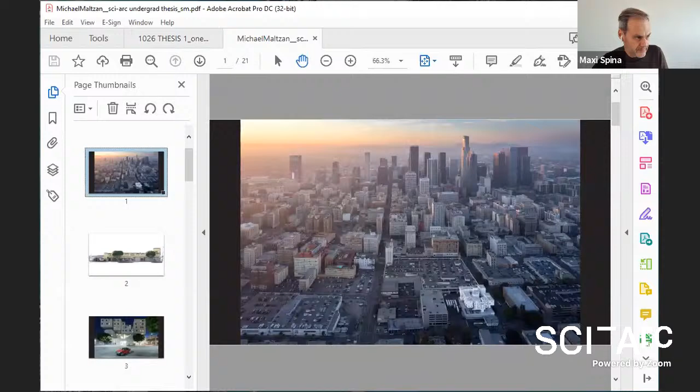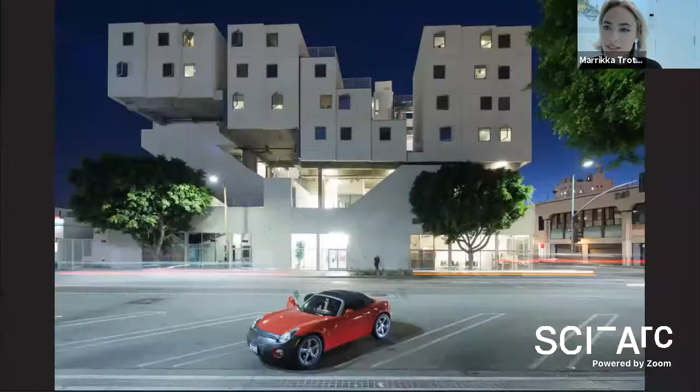Thanks, Maxi. So hi, Michael. Hi guys, thank you so much for talking to us today. I'm really looking forward to you sharing your work. And it's funny because, you know, here in Los Angeles, at least the initial encounter with Michael's formidable reputation comes in the form of housing.

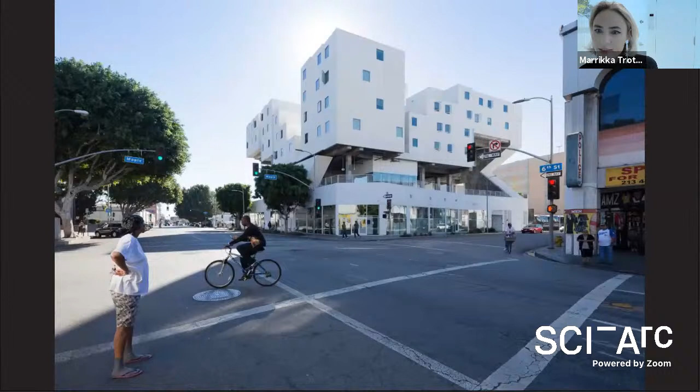But actually, there's a larger approach and a whole range of typologies that the firm has taken on since Michael founded it in 1995. So I just want the students to be aware that we're looking at a small slice of the overall work. It is, I think, particularly germane though, based on the amount of housing as a program typology that is available and being engaged by our students this semester, and also the ever more obvious urgency with which housing needs to be addressed in the city of Los Angeles in particular, as well as in many other places around the country and indeed around the world.

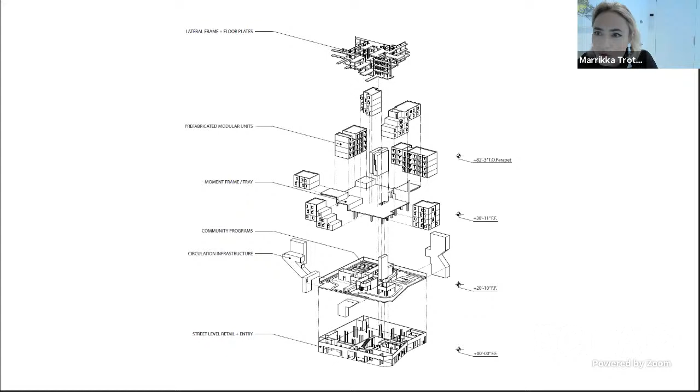So just a few hot seconds on Michael's CV, so you guys know where this guy is coming from. He actually started out in architecture and art at the design school, Rhode Island School of Design, RISD, on the East Coast. Graduated there with the Henry Adams AIA Gold Medal under his belt, proceeded on to the Harvard GSD, where he graduated with an MArch in distinction. He is now a fellow of the AIA, the American Institute of Architects.

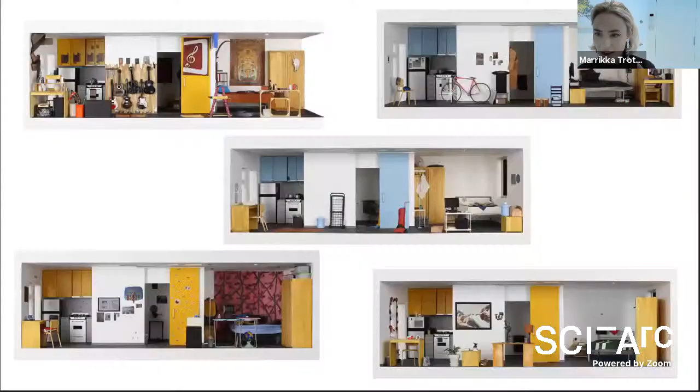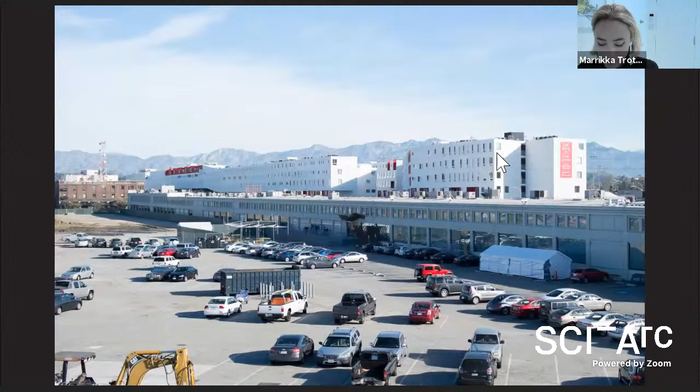He has received many, many AIA awards, including most recently a 2020 Best of the Millennium Award. I think that's pretty cool to win a Best of the Millennium Award from the Los Angeles chapter of the AIA. His work is part of the permanent collections of MoCA LA, MoMA New York, and the CCA up in Montreal. He's participated in the Venice Biennale a number of times, most recently in 2020. He's a recipient of the American Academy of Arts and Letters Architecture Award. He's elected to the National Academy of Design in 2020.

And actually recently I caught a really wonderful conversation, Michael, that you did with some of your colleagues at the GSD. It was a conversation hosted by the Joint Center for Housing, and you were specifically being asked to respond to the prompt: what exactly can architecture do about homelessness? And this is an ethical issue that has long been at the heart of Michael Maltzan's practice and Michael Maltzan Architecture.

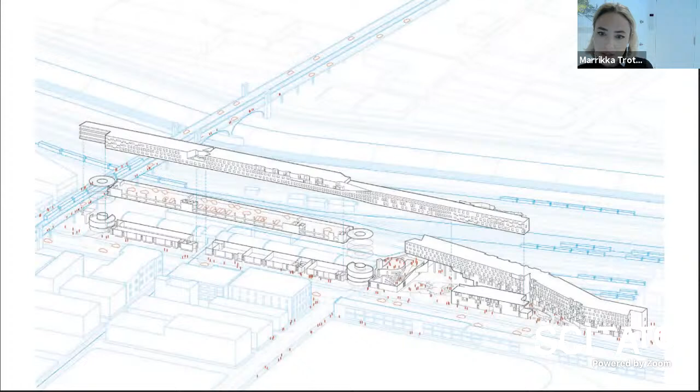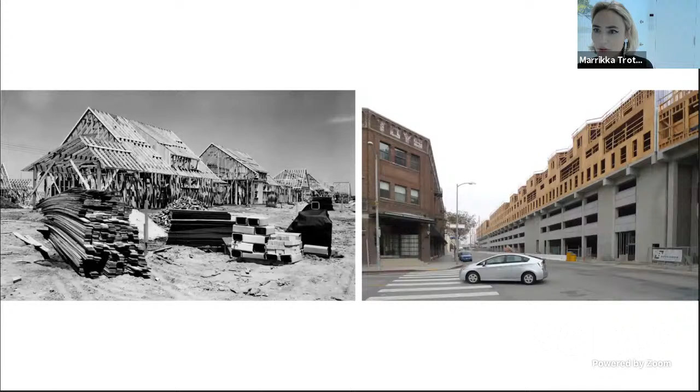Some really innovative work in terms of not just getting it done, but also the scale at which it operates. So with all that being said, we decided to focus today on two different housing projects, each very innovative, and one of them many of you SCI-Arc students know intimately because it is the building in which you live. And that, of course, would be One Santa Fe.

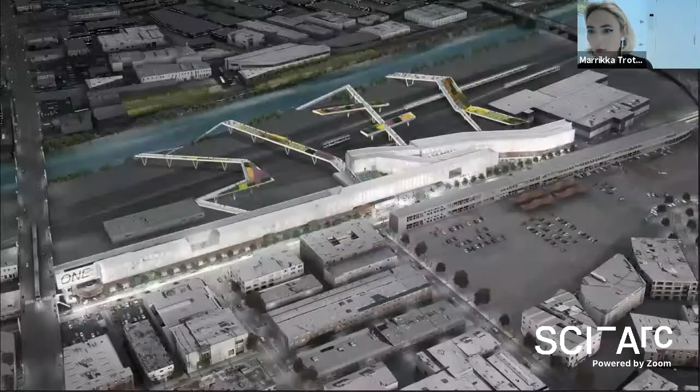But before One Santa Fe, Michael pioneered an architectural typology that had not existed in Los Angeles before then, known typically as permanent supportive housing. And he worked with some real thought leaders in the city, Skid Row Housing Trust, to bring about what seemed at the time to be an impossibility.

Housing for Los Angeles's homeless, many of them facing the other conditions that often go along with that. The unhoused population faces issues related to veterans, PTSD, and other psychological traumas, as well as rates of HIV/AIDS not seen in the general population, as well as complicated issues surrounding addiction and the kinds of psychological damage that go hand in hand with not having a place to call one's own over time.

And actually, one of the critiques that was leveled against Michael's work with projects such as the ones we're going to look at today is, how could you possibly design something so nice for these people, for this population? Strange question to ask, but it goes to the heart of something that concerns all of us in Thesis, which is, what is it that architecture does? What is the work of architecture? How does it operate in the world?

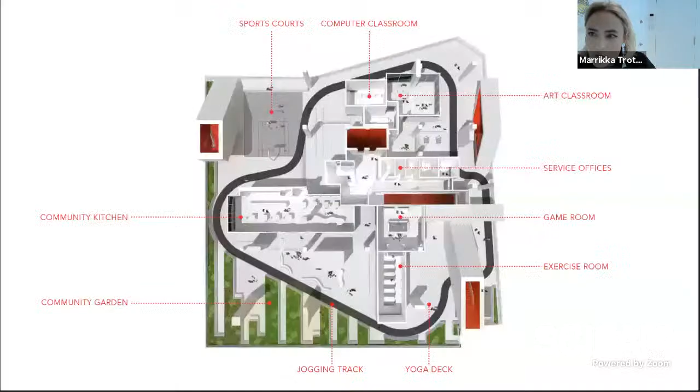And can it operate both as something that does the work of putting roofs over people's heads, and as something that does the work of communicating, of something that represents, of something that embodies, of even something that maybe bodies forth. So all that to say, can't wait for this.

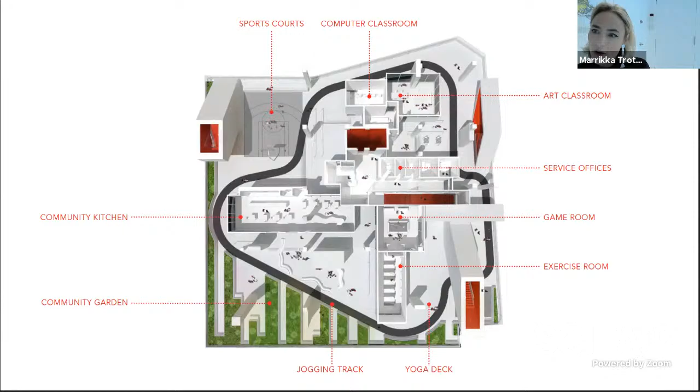Michael, thank you so much for being here. And would you like to give us a little bit of background about how you got involved in housing to begin with in the city of Los Angeles, and maybe start from there?

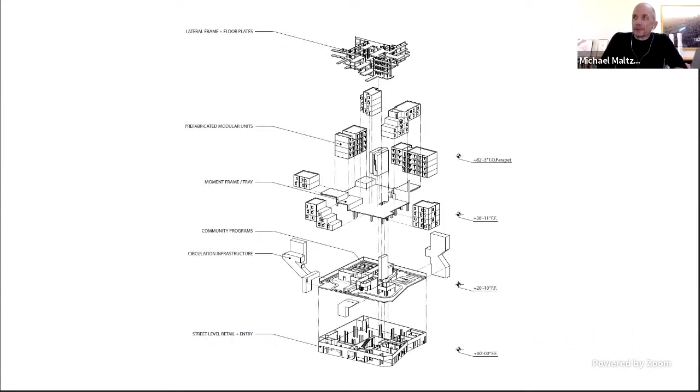Sure, and thank you for a very nice introduction. I have been working, Marrikka, as you mentioned, on a wide range of projects and typologies, programs, since the starting of my practice. That was in 1995. And while the work has been varied, and also varied geographically,

I, from a very early point in my career, was interested in what role architecture could have in the city, especially in very complex challenges and issues around social concerns, community concerns. And a lot of that grew out of being here in the mid-1990s when the Rodney King uprisings, the riots, took place. It was a moment when the city, its true personality and many of its real challenges, many of its real issues, became much clearer to everybody.

And a lot of the romance of Los Angeles started to drop away, because it was clear that there were incredible inequalities. There was lack of access. The city was really a city of many, many different siloized communities, not really connected. LA had this myth of being a multicultural city for many years, but it was clear at that moment that, in fact, Los Angeles was a city of many cultures, but not really an integrated multicultural city.

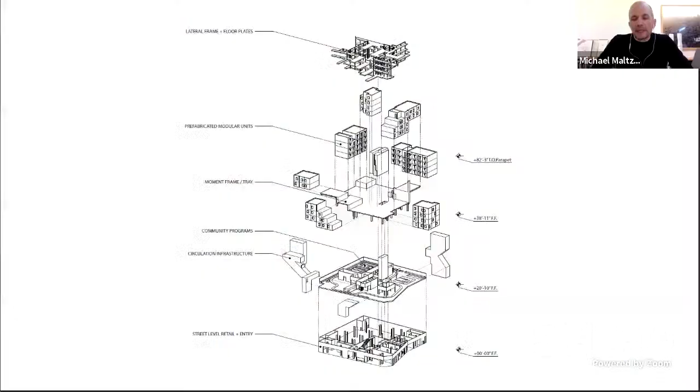And the way that Rainbow Apartments, the way that the construction contract had been structured, the contractor had the ability to raise their prices if the materials that they were buying at that moment were at a higher price than they had estimated. The problem was that was happening to everything in the project. The project had a fixed budget, and it meant that we had to keep pulling things out of the building that I thought were extremely important parts of the architecture, and also extremely important parts to what I thought would ultimately be the livability, contributing to the livability and the quality of life for the people who would eventually become residents at Rainbow Apartments.

When we were done, I looked around at the building and there was very little left of what I had imagined the building was, what the architecture of the building was. And it was an exhausting and quite disappointing process. And I got to the end and I thought, beyond disappointment for the architect, I was really genuinely

anxious and almost a little depressed about this idea that people would be living in a building and that it wouldn't be a great experience, that it would be a really diminished experience, and that we had somehow failed not only architecture, but we had failed the residents, the community that was meant to live there.

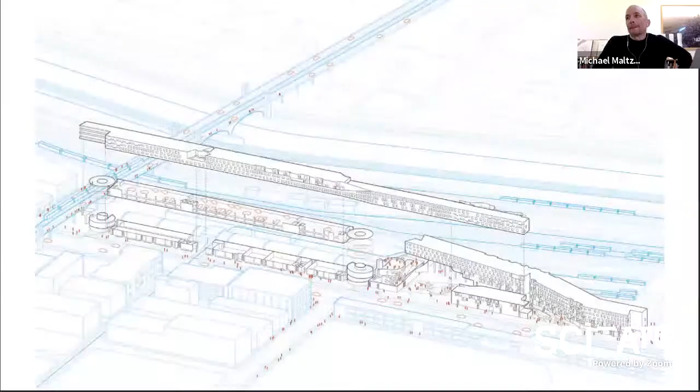It took months after people had moved in. In all of these buildings, we continue to go back and see how the buildings are performing with the residents, and they get a lot of feedback as well from the residents. The Housing Trust gets a lot of feedback. And surprisingly to me...

The community was thriving and the tenants, the residents were thriving. And I started to realize in talking with people there, seeing how they were using the building, that while we had lost much of what you might typically say is the architecture, the more fundamental aspects of the architecture, the planning, the relationships between spaces, the way that the community was organized and could choreograph themselves in the building, really the fundamental things that we do as architects that we learn early on in our first years in studio and bring to a project, how you organize a project, that those things were actually, they were really...

They were working, and they were the things that were having the effect on the residents and allowing them to have significant individual lives, to have privacy, but to also have semi-public and public lives, and to create and form community in the building. And there was a diversity of opportunity for how they could construct their life that didn't diminish or minimize their individuality, but allowed that individuality to grow.

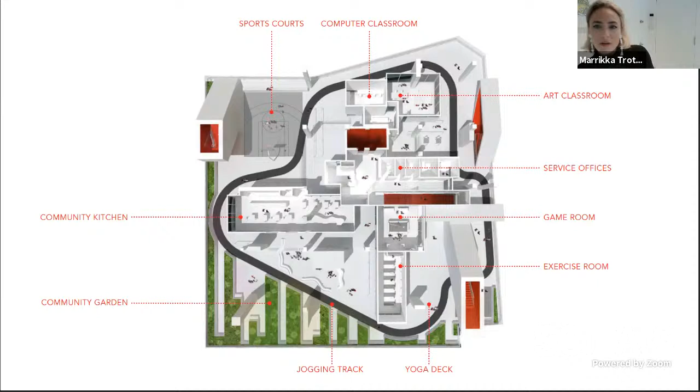Thank you for that. That was so, so beautifully put.

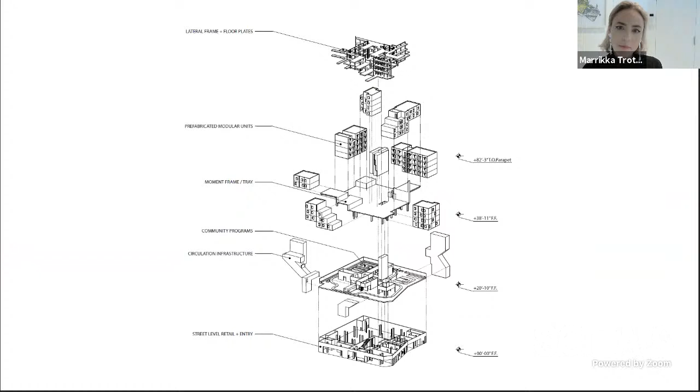And I'm so curious, as I imagine some of the students listening are, what some of those essential moves were in that project. I imagine that they would include things that you had already put on the table or made part of your toolkit in the Inner City Arts project, where you're talking about a kind of arrangement of individual elements that form almost a microcosm or a mini urbanism. How did that play out in the kind of stripped down version of the Rainbow project?

One of the most important things that we did was to reorganize the typical apartment massing that you would have seen before Rainbow in most of the housing that the Housing Trust had done, but frankly, in most even market rate housing in and around the city.

Most housing is built in a very similar way to a kind of hotel. There's a corridor, double loaded corridor down the middle, and there are apartments, or rooms in the case of a hotel, on either side. It's very efficient, the least expensive way to organize a floor, because the corridor is actually serving apartments on both sides. We deal a lot with things like net to gross, which I'm not going to get into unless somebody wants to, but we're trying to maximize the apartment spaces and minimize all of the other collateral spaces like corridors.

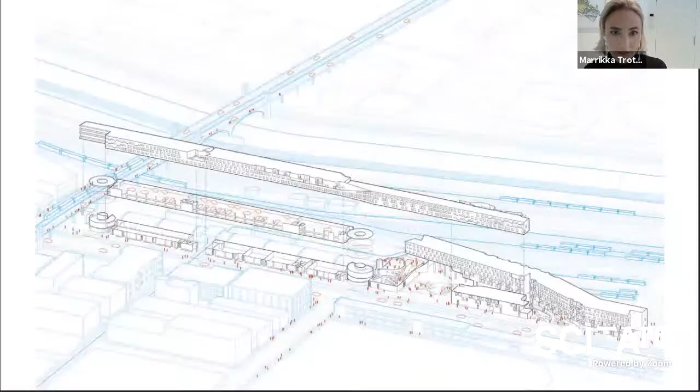So those are two examples. I think that's super helpful. I'm struck by the degree to which subsequent projects shunted a great deal of the architectural effort into just that: the distribution of spaces, the arrangement of spaces, an emphasis on circulation, an emphasis on the placement of different levels and different ways to interact, over and above a lot of other things architects might normally decide to put their budget toward. There's a simplicity, almost like an absence, in the articulation of surfaces in a number of these projects.

It's not that they're unarticulated, they are articulated. Perhaps you might speak a little to the role color plays in some of these projects, and how that developed out of the Rainbow project, from what I understand. But the focus is on this arrangement.

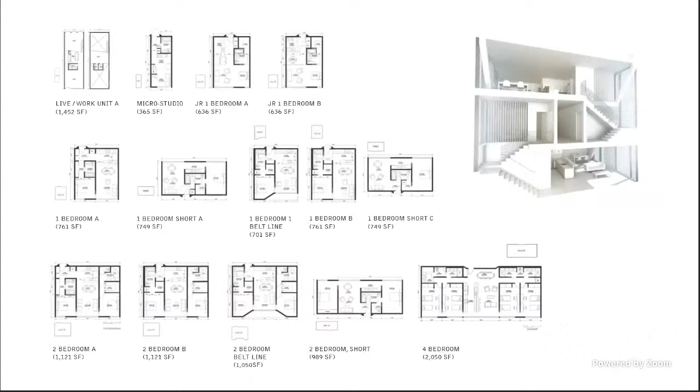How's it going? Right, well, that's okay. Yeah, hang on one second. I took the girls to get their shots too. Genevieve, thank you. All right, so I'm working on the... I just muted her, sorry. Okay great, thank you, okay go for it.

It's absolutely true that the arrangement is about what materials you actually have to work with as an architect. You have all of the building materials: windows, obviously doors, walls, all of those things. You can try to make an architecture out of that, and that's a hugely important thing.

But even before that, you have the program and the pieces of the building that have to exist at a very fundamental level. Spaces like the laundry room or the TV room may not seem very glamorous, but what you do with them and where you put them makes an architectural decision. It's very fundamental.

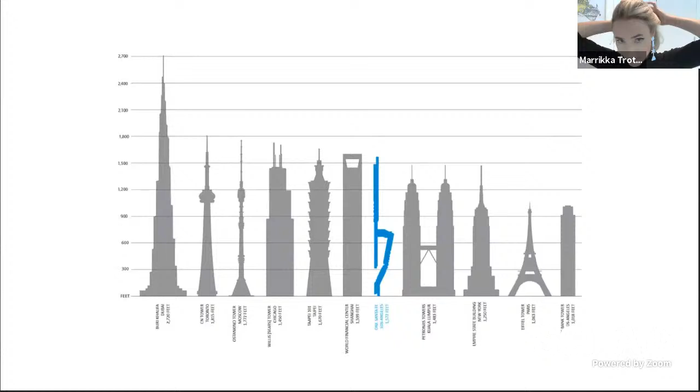And then maybe we can switch over to lessons learned and how they might pertain to market rate housing like Santa Fe, where all of a sudden you've got a project that is heroically expressing something that did not seem possible within the status quo, even though it's employing all the, as you call them, historical efficiencies that are embedded into that system.

So basically, if you look at the outside of the Star Apartments, you feel like you're looking at something designed. You know that there's an architectural presence there, even in the way that tray is treated.

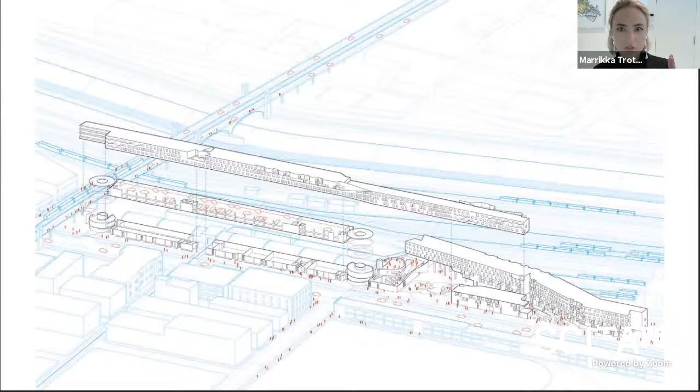It's almost like it's raised up in a gesture that says you would hold precious things in your hands. These people matter, and this work matters. It sits in the city almost as a challenge to all the other buildings around it that might be built using those same historical efficiencies, but have not been able to engage one of the most pressing issues of our time. The challenge for all of you is to say, where can I use the system but so differently that even operating within the status quo as it exists in my time, I am able to resist the assumptions about the invisibility or unworthiness of particular problems or populations.

I've heard people say, well, that's all well and good, but you'd have to really scale this up for it to be meaningful. I think I remember you saying in an interview that while that is true, and there are ways to scale it up, it might be worthwhile to consider the aesthetic work and the work of appearance that architects are always engaged in. So what happens when you make something that wasn't visible, even if you'd need 500 of these Star Apartments populated around Skid Row to do the work of permanently and supportively housing that population? Still, even just having one that's built and standing in the world, there's already a work of representation being done.

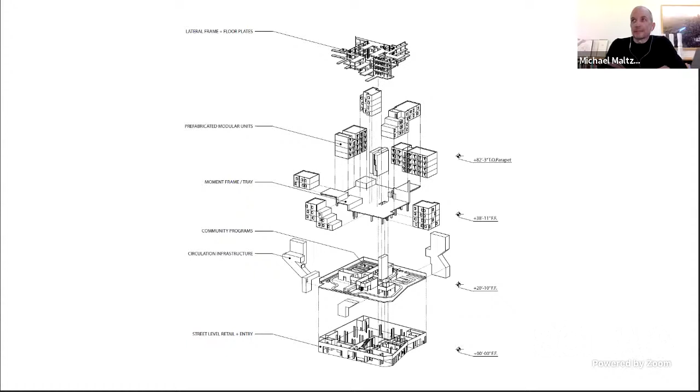I think that gets at a very important question for the role of architecture in this cultural and social problem. If you look at the analyses that have been done around housing and housing deficiency in the Los Angeles area, certainly this portion of Southern California, the numbers of apartments or housing units that need to be built to achieve real housing parity and housing equity are staggering. McKinsey, Rand, all of these think tanks have looked at studies of the housing challenge, and the numbers easily exceed, in many cases, 500,000 housing units that we are deficient, and most people feel those counts are actually quite low.

That means the scale of the need for housing is beyond the scale of the individual architectural form. They're beyond a single building being able to necessarily make an immediate dent in those numbers. That 400 or 500 or 600,000 number runs the full gamut from individuals who are homeless all the way through workforce housing, affordable housing, market rate housing, and beyond. So it really spans the full spectrum of housing. Nonetheless, it's a huge deficit. If you add up all of the housing I've been involved in, it's a tiny fraction in terms of units.

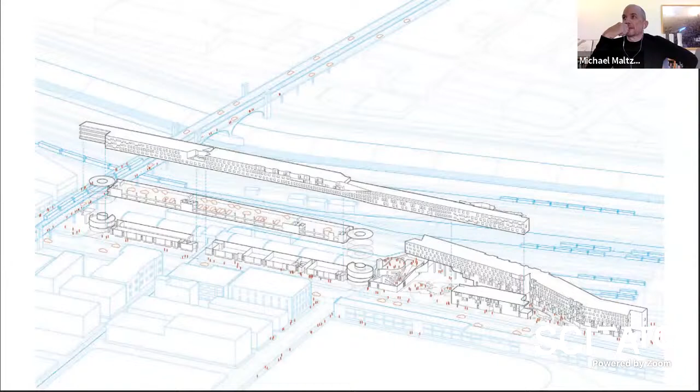I hope everyone here is aware of the project currently under construction, the 6th Street Viaduct, which Michael has designed and which looks like it's almost done—next summer. For the bridge, the landscape, all the parks, all the space under the bridge: on the Arts District side there's a large multi-purpose arts and cultural event plaza, and on the east side an 11-acre park with a wide range of activities. The park and plaza will start around the time the bridge finishes, but the bridge itself you'll be able to walk, drive, or bicycle across by summer of next year.

So we shall have to plan a field trip, a SCI-Arc field trip. It's very close by, very convenient for us.

Even the role of a project like One Santa Fe already begins to suggest that architecture is engaged in the work of bridging at the same time that it's engaged in modeling a kind of urban microcosm. I've heard you speak about these things, and I'm curious because those aren't things that would normally automatically go together. One might see one's work as an island, or an archipelago of island projects, maybe with that inward courtyard focus that a number of your projects have, aiming to create a model of community or of the city as a whole. Or one might think about the cliches we all say about stitching together the urban fabric, repairing it, bridging diverse communities. But I'm struck by the degree to which you're committed to doing both.

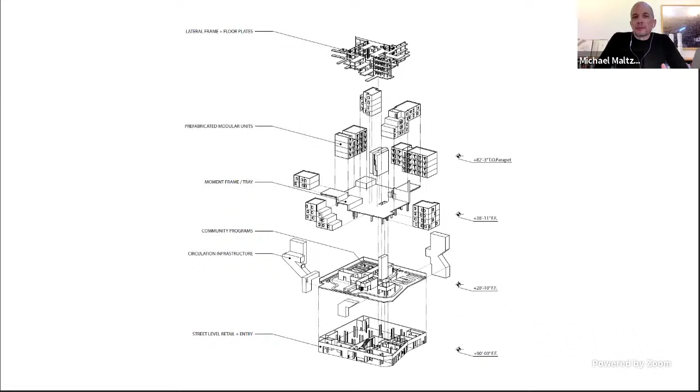In a city like LA, which arguably doesn't have a lot of examples of urban fabric related to density—there are urban fabrics here, but not many related to density and scale—a building at this scale meant we had to think about it in a very different way than how you'd approach either an urban design project or a singular architectural project.

The way I thought about One Santa Fe, I became interested in an idea I was calling anticipatory scale. What I mean is, if you look at aerial pictures taken right after it was built, showing the area around SCI-Arc and One Santa Fe right when it was being built, there were individual buildings but a lot of empty lots—a lot of openness. The river is right next to it.

It was not an area that you would point to and say that's a dense part of the city. The scale was all very modest, the buildings were all more singular, smaller buildings. Certainly SCI-Arc was the outlier and was definitely the significant building in the neighborhood.

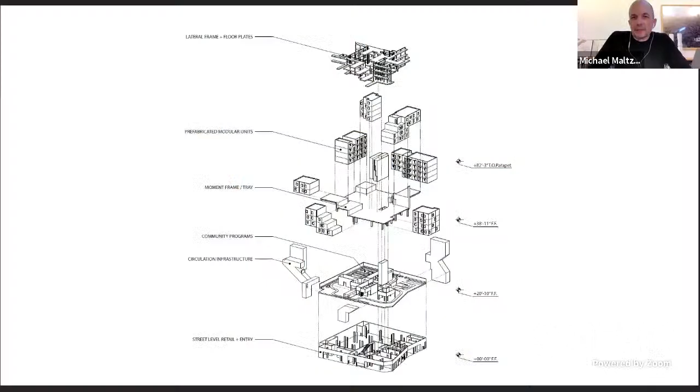That's a slightly different set of questions than the bridge. Really, many of the issues for me around the bridge were how to create what was infrastructure today for a city like Los Angeles - a city that has been largely defined by its identity, largely defined by infrastructure, mostly the highways, the sprawl of the suburbs, and the long sinuous lines of the highways.

But what does it mean to be trying to do infrastructure, not immediately post-war, but what does it mean to be trying to do infrastructure for where our culture, our society is today?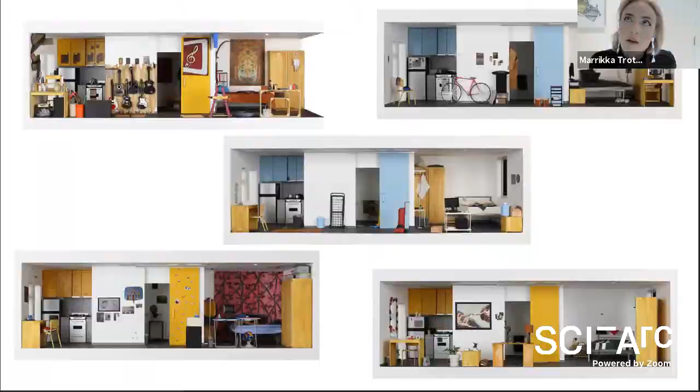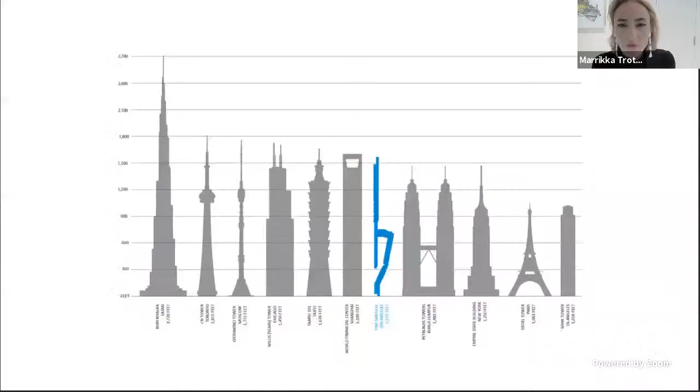I think embedded in all of the comments you just made, and all the ways you so accurately defined the role of the architect, is not just this future-looking engagement with what the city will be, but let's say a wager toward a city that is the one we want rather than the one we have. So the city not as a kind of neutral entity that has its own logics and continues to evolve however it chooses, but something in which the architect has a stake along with many other stakeholders, defining that future, making it visible, and even anticipating it in built form.

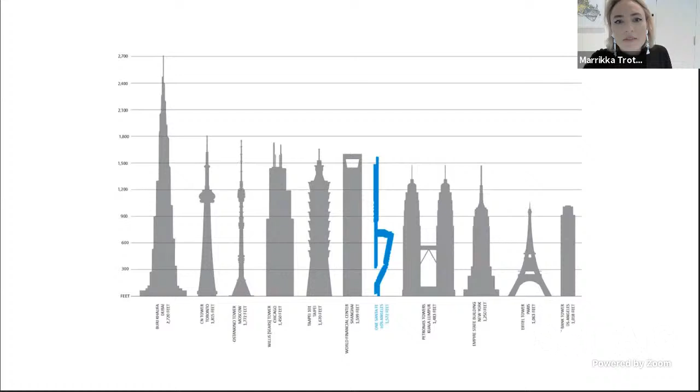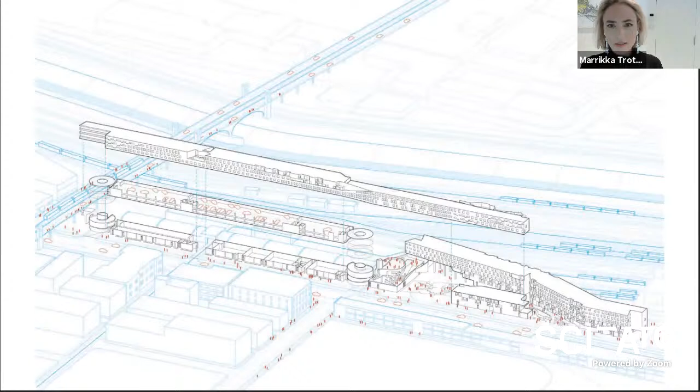I feel like the way you're talking about architecture here is really, really generous. And I hope all of you students listening are picking up on all the strategies being presented and all the stakes and claims being not just laid out, but also demonstrated in built form. I want to make sure, Michael, that we give these students a chance to also ask questions and enter this conversation, if that's all right with you.

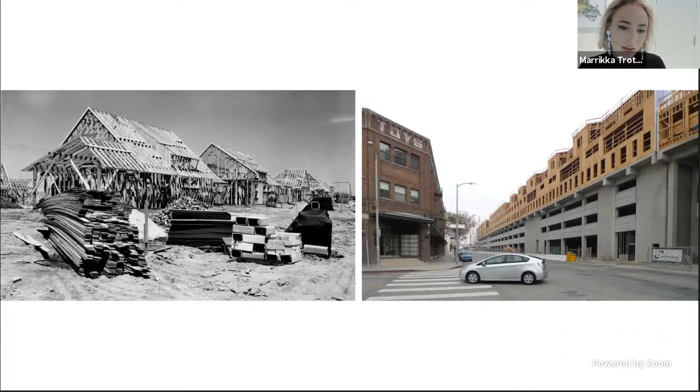Yeah, absolutely, absolutely. And also, not least, my colleagues as well.

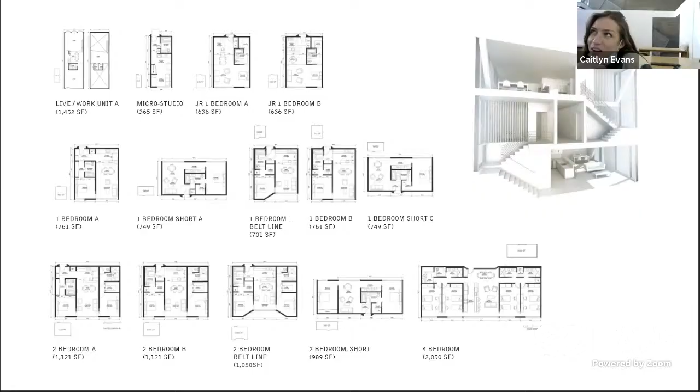I think my first question would tie back to when you guys were discussing how our city needed about 600 copies of the Star Apartments. I'm wondering your opinion on the copy when dealing with such a socially strained issue - at what point is it iconographic from a copy, and what's your perception or how would you deal with that? I guess it's kind of the same for One Santa Fe. When you're dealing with such a large scale project, the idea of the copy comes into play, and what do you do to mitigate that, if that makes sense?

Maybe Caitlyn, is your question about should an architect be concerned about creating a more unique form and then somebody copying that?

I don't think it's about other people copying, but for example with the Star Apartments, if we were to put 600 of the exact same building across the city, do you think that would in turn be problematic?

It's a good question. I think it depends on how you look at a project like Star, and how you define it. Star has a very clear architectural ambition, a very clear massing sculptural ambition. It was meant to have a type of presence and appearance, and a boldness that forcefully put on the table ideas of building over an existing building, adaptively reusing an existing building in a city that generally scrapes sites clean and builds completely new.

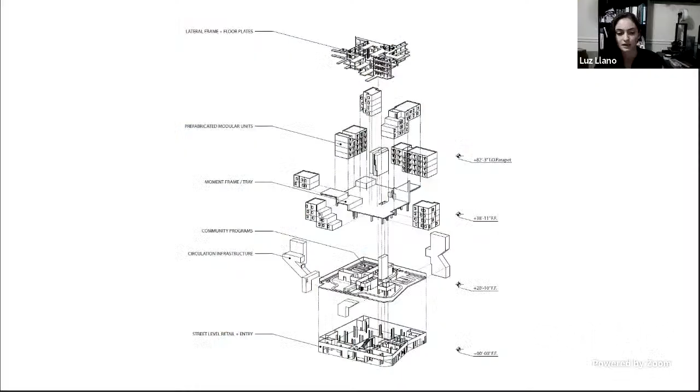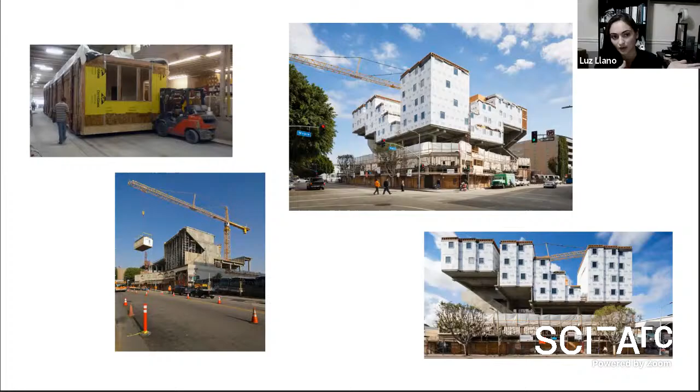I had a quick question about the elements you were talking about that had to be taken away from what you conceived as the architecture of the apartments once all these budgetary constraints came in. I think there are some very valuable lessons, especially about giving agency to the people who live there to create their own environment, through an incidental way of having to take the architecture away. But a concern we have in Thesis is how do you bring in your affinities into the project, through the feedback you've had over the years with these projects and your own affinities?

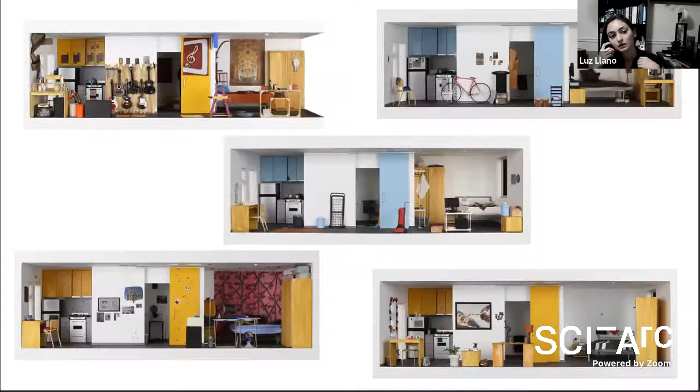What would be the one architectural element that you said got taken away that you would still want to keep, want to bring back - the one thing that you go to sleep at night and think about?

And I definitely have that list. It's on repeat almost every night, it seems like.

I would say it was really that we lost a lot of—in totally pragmatic terms, we lost a lot of glass in the project, which meant we lost transparency. And I regret that, because

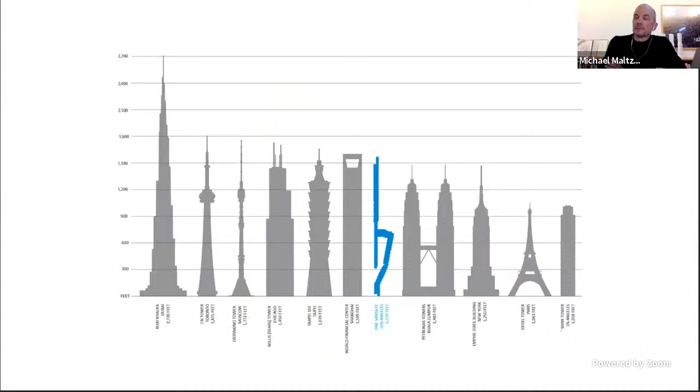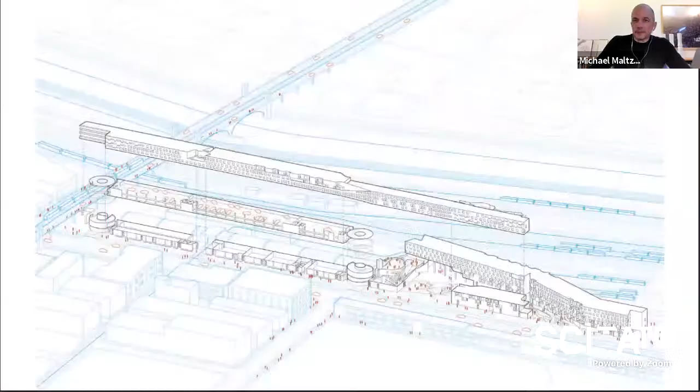while I felt like we were able, especially in that first project, Rainbow, to hang on to what we had created in terms of the internal relationships between the community within the building, I feel like we lost the ability to make stronger relationships between the community inside the building and the community outside the building, the city as a whole. Of course, these buildings, all buildings, if an apartment building, it needs to be safe, it needs to be secure, and so it can't be just open to the city.

But it shouldn't be a fortress, and it still needs to live in a connected life with the city as a whole. When we did the second project, which I don't think are in the images, with the Skid Row Housing Trust, Carver Apartments, it's a project over by the 10 freeway at the end of Hope Street, right by, just adjacent to the whole LA Live development.

It's a round building, and it was very conscious on the part of the Housing Trust to, one, get a site that was off of Skid Row, to try to meet the homeless community in all of the places that it exists, which now really is everywhere in the city, but to not just balkanize or siloize or isolate the homeless community to one district in the city.

By placing it adjacent to the 10 freeway, there was the opportunity to really make it visible, which goes back to some of what we were talking about before. The round shape actually came from a little bit the site shape, but really came from acoustic concerns, because the highway is such a loud noise source. The round shape helped to reduce the impact inside the building of the noise, but it also created this unusual and very visible shape as people were driving by.

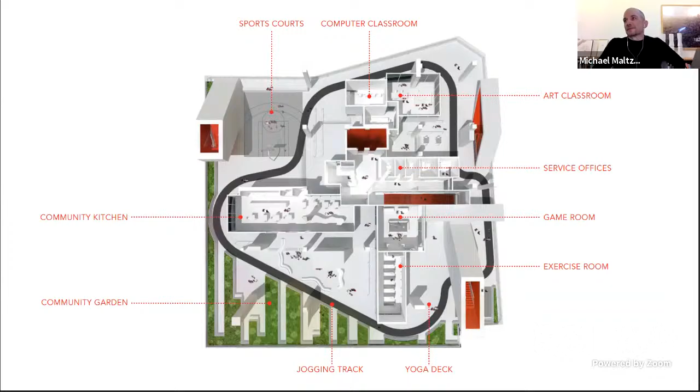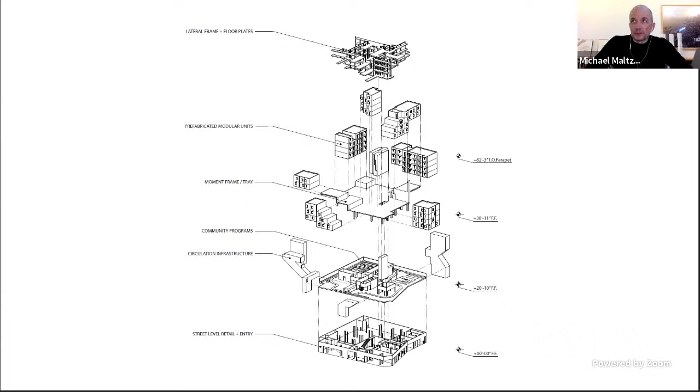And I don't have any pretensions that it's truly a front porch or acts in the same way that a front porch does on a smaller street. But in a way, it was just another attempt to elevate the possibility of communities in isolation to see each other.

And I don't think that's just a question, frankly, of—or just a challenge for the homeless community. I think that's a challenge for all of us, especially as isolated as we are because of the lives that we lead online. Of course, over the last two years, that's become even more extreme. But it's very deeply rooted in culture as a whole. And so I think that's something that I wish we hadn't lost.

It's something that I continue to try to find ways to even expand in our projects today. And I believe it's something that's important, not just in these particular types of projects, but I think it's a real issue and question for the way architecture connects to cultural and social challenges in all project types and all socioeconomic levels.

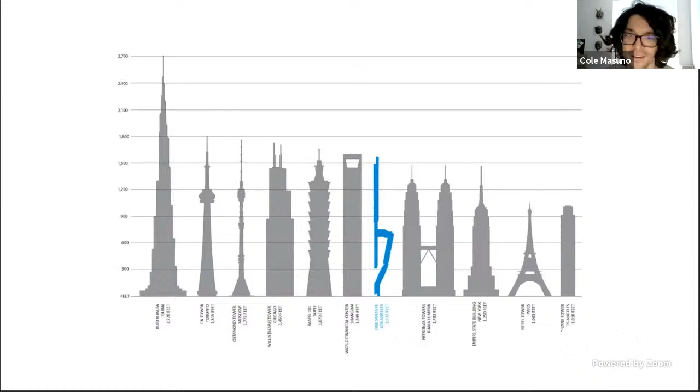Hey, Michael. Marrikka brought up a good point about your role as a stakeholder—like, you want to produce architectural interest and you want the space to be livable as well. From the standpoint of a developer, these are projects to increase their personal wealth. And I was just curious—the legend says that at one Santa Fe, there was a massing that was a single loaded corridor and that it looked really cool. I was curious if you could speak about the experience of working with the developer, and maybe, if it had gone differently, how could you have been persistent about keeping the aesthetic interests?

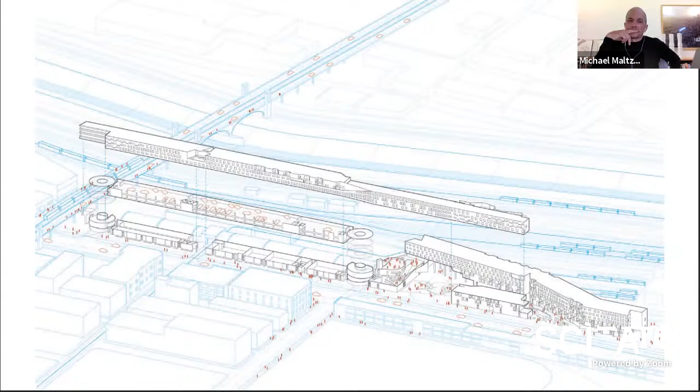Right. Yeah, Cole, it's a very good question, because that's always—that's an ongoing conversation that you have as an architect, I think, with generally all of your clients.

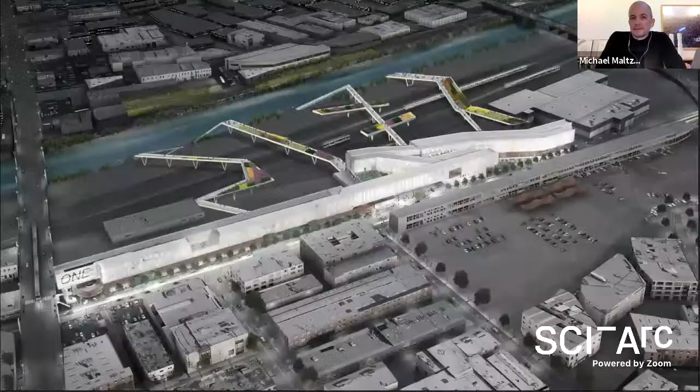Frankly, not just the for-profit clients like we had at One Santa Fe, but the nonprofit clients as well, because all clients have ambitions and goals, and those are things that they bring to the project and are very real. There are different ways of trying to take that on. You can try to convince the clients through your sheer magnetic, persuasive personality. Maybe that works, but I've found that at best that holds off the real issue just for a little bit of time.

I've found that it's much more fruitful to try to understand right at the beginning of the project what those goals and ambitions really are, and to probe those very deeply, to ask very direct questions of the client, and to understand what their ambitions, what their fears are, what their thresholds are, and to try to get a sense of that.

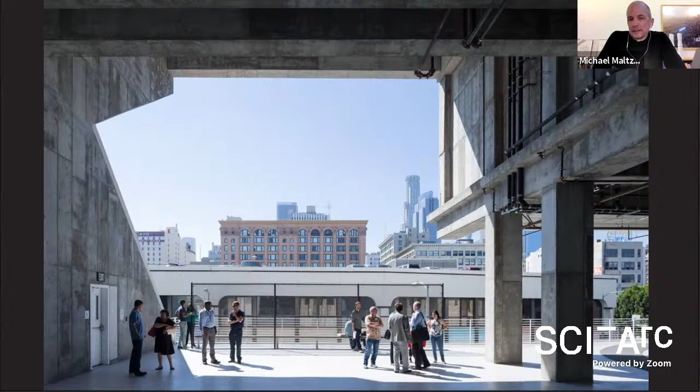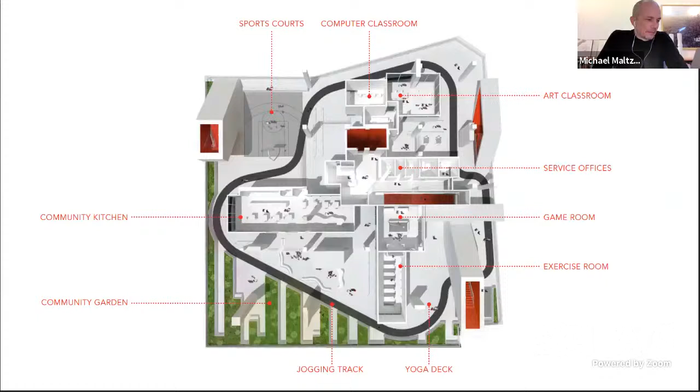Then I think as an architect, you have the ability to find a range of ways of implementing those ambitions, but doing it in a way that I believe makes a building that makes real contributions, of course, to whoever is going to be living there or working there, but makes a real contribution to the city as well around it.

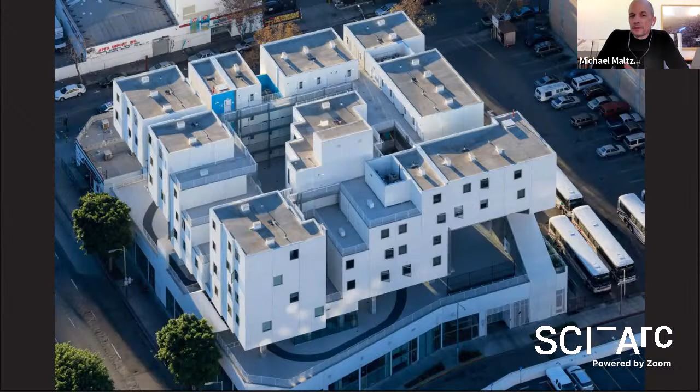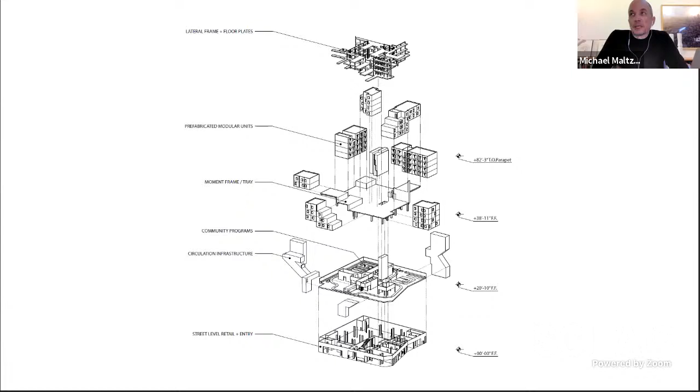And if there's a point where you feel like you've crossed a threshold, or you're being forced beyond a threshold that you don't believe in, then I think that's a different question. That's a question for each architect, where that threshold, where that line is, and whether you need to respectfully bow out, or is there a way to continue on?

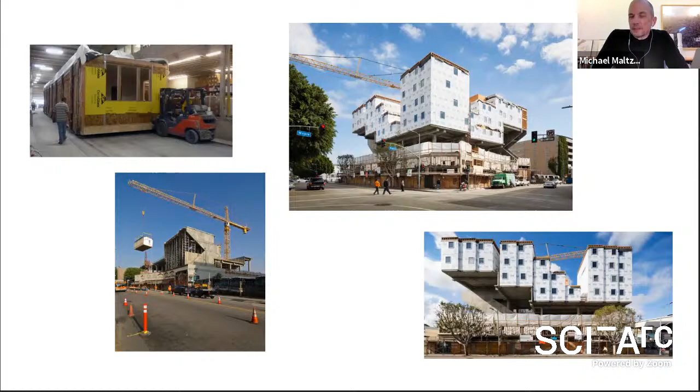I work very hard before we even get started in a project to understand that from the client, so that if we need to bow out, we do that before we start the design. If we take on a project, I'm committed to try to find a way to both achieve those goals that the client has, but to make something which is, I believe, a strong piece of architecture.

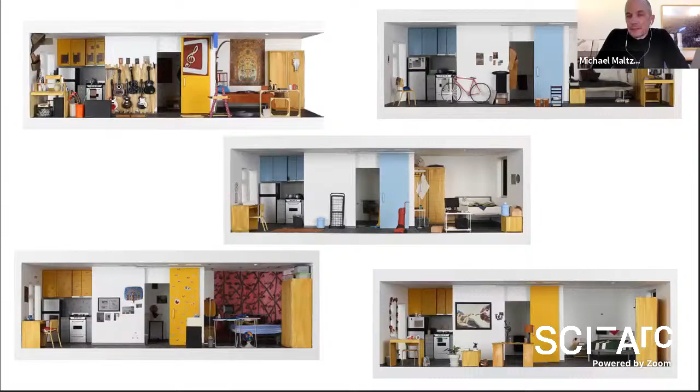In the case of One Santa Fe, you were talking about the single loaded corridors. We massed the building a number of different ways. One Santa Fe went through many different changes. At one point, a portion of it was in the trapezoidal, triangular part of the site, the wider part of the site, to the south, really directly across from SCI-Arc. There was one portion which was much taller, about a 12-story building.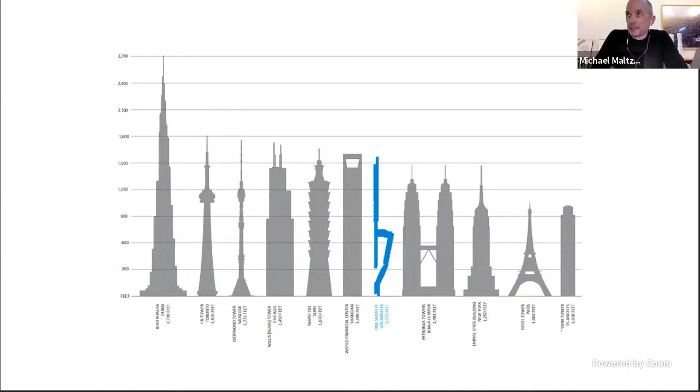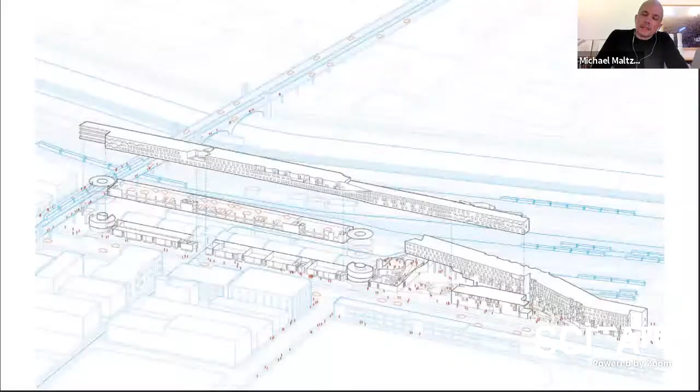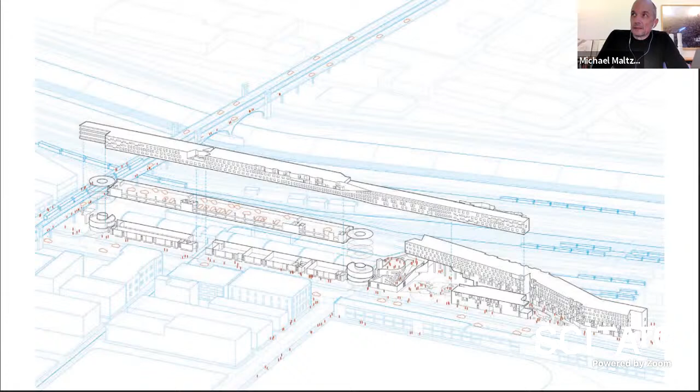For a lot of reasons, especially around the type of construction it seemed like we were going to need to employ - again, that stick-built construction - the building became more traditional, very horizontal, more or less 5-over-1 construction. But that put a lot of pressure on hitting the number of apartments that were not only going to make the business model work for the developer from a market rate standpoint, but we were also looking to provide 20% of the units as affordable units, which meant that the business model needed to cover the offset on the 20% affordable units.

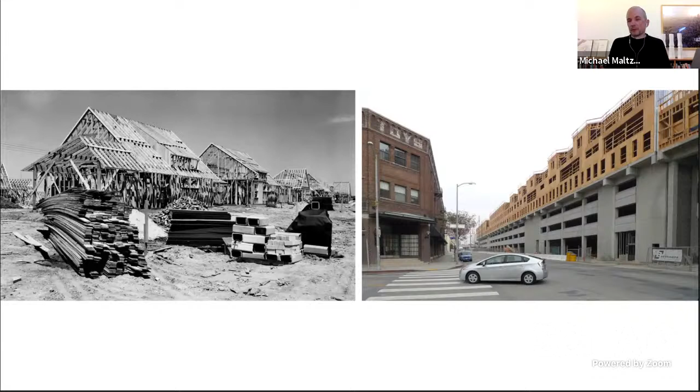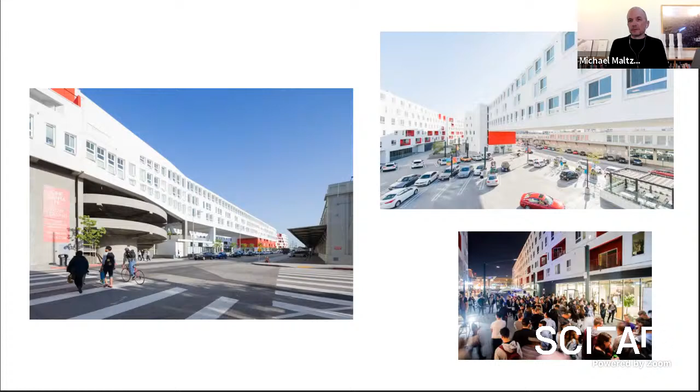I personally had a goal to try to hit that number, that minimum number, and even see if we could go beyond that, because housing was already starting to become a real issue. I felt that the balance of providing some single loaded corridors, providing a number of double loaded corridors, but rethinking the way those corridors worked - in many cases they're open air at the end, so they're not artificially climate controlled, but naturally ventilated - that those were reasonable trade-offs to try to produce as many apartments in that part of the city as possible.

I think you have to have a client that's willing to have you as an active partner in those debates, and create a balance that you can stand behind.